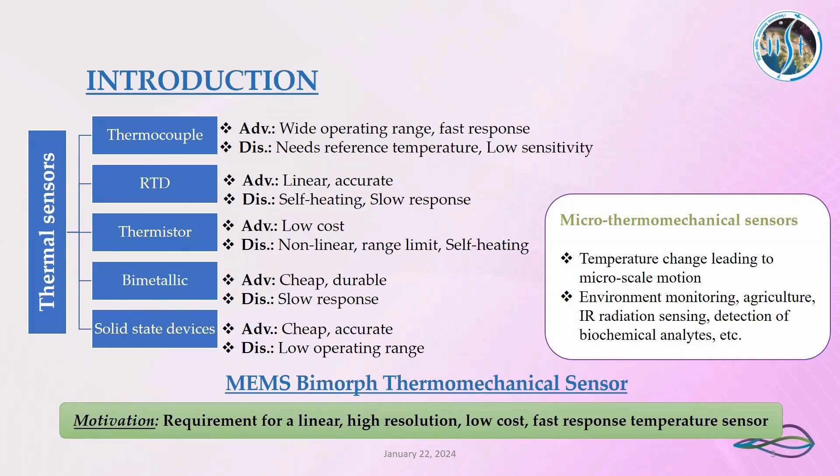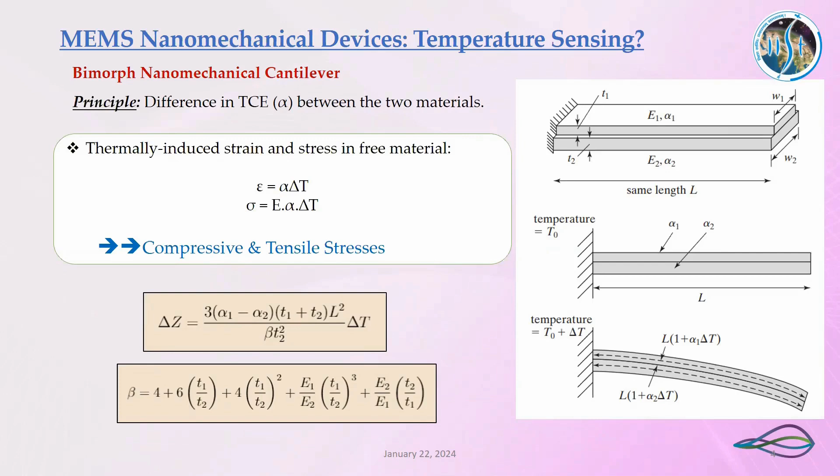So now, how can MEMS nanomechanical devices be used for temperature sensing? The answer to this is a Bimorph nanomechanical cantilever, whose principle is the difference in the thermal coefficient of expansion between the two materials. As shown here, whenever there's a difference in the thermal coefficient of expansion between the two layers, and a temperature change occurs, there will be a deflection in the tip of the beam as shown in the equation given here. So one of the layers will have a compressive stress while the other will have a tensile stress.

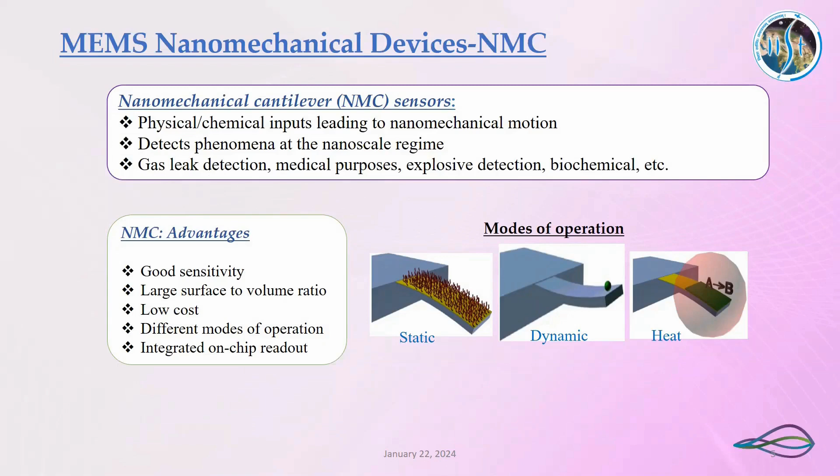A nanomechanical cantilever sensor is a device which converts any physical or chemical input into a nanomechanical motion, and these devices have several applications such as gas leak detection, medical purposes, explosive detection, etc. These cantilevers have several advantages such as good sensitivity and low cost. Nanomechanical cantilevers can be used in several modes of operation such as static mode, dynamic mode, and heat mode. In this Bimorph sensor, we have utilized the heat mode of operation for our work.

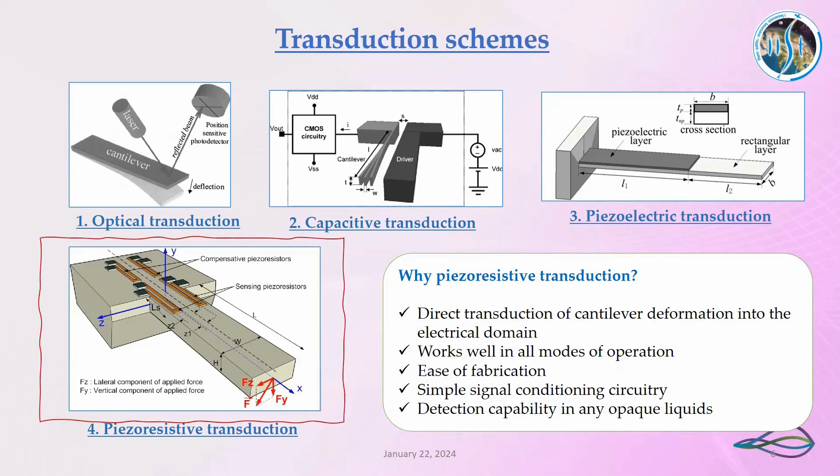There are several transduction schemes such as optical, capacitive, piezoelectric, and piezoresistive schemes. Among these, piezoresistive transduction schemes have several advantages such as direct transduction of cantilever deformation into the electrical domain and ease of fabrication. So combining the piezoresistive transduction scheme, we came up with a new architecture. For getting maximum sensitivity in piezoresistive sensing, we have to maximize the difference in the longitudinal and transverse stress, as given in the equation here.

Now consider two cases: point loading and isotropic stress loading. In the case of point load, the sensitivity is maximized since the difference between the longitudinal and transverse stress is maximum. While in the case of isotropic surface stress, the difference between the stress components is nearly zero. Hence, in order to maximize sensitivity, we have to use the case of point load. But in this Bimorph cantilever structure, it's minimized.

Hence, we have to bring up a new architecture by combining a Bimorph membrane structure with flexure. So instead of a cantilever, we use a circular Bimorph supported by flexure on four of its sides, so that the isotropic stress is converted into uniaxial stress. This new device is called the Thermo-Nanomechanical Membrane Flexure Sensor, or T-NMF.

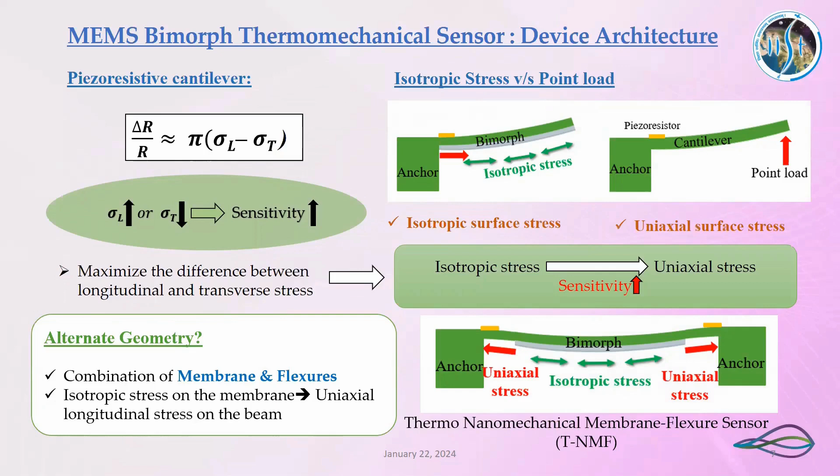Now, design and simulation. Basically, this is the structure of a T-NMF: a circular Bimorph membrane is supported by 4 beams on 4 of its sides, and on each of these beams a resistor is placed. These resistors are connected in series, forming one leg of the Wheatstone bridge. Whenever there's a temperature change, the Bimorph will bend, causing the beams to bend as well. This induces a stress in the piezoresistor, which causes a change in resistance, and this change is measured by the signal conditioning circuit.

Based on some literature review, we found that aluminum and silicon have the maximum difference in thermal coefficient of expansion between two layers, and hence we chose these two materials for the layers of the membrane. For the piezoresistive material, we needed a high gauge factor piezoresistor to maximize sensitivity, and hence we used indium tin oxide as the piezoresistive layer.

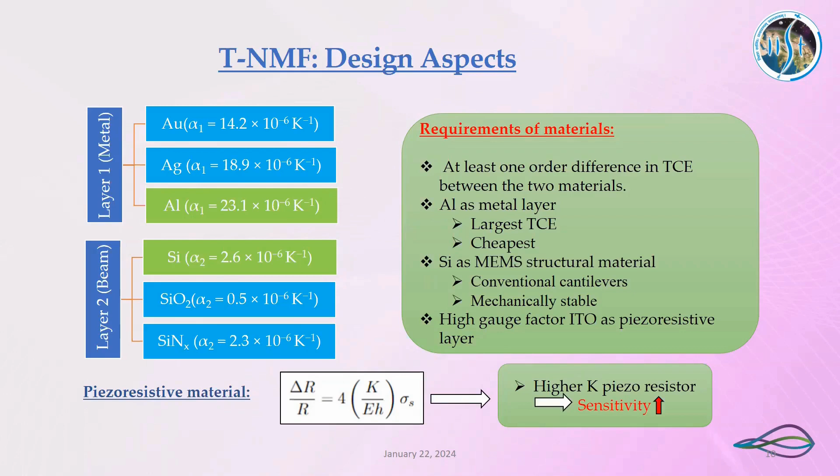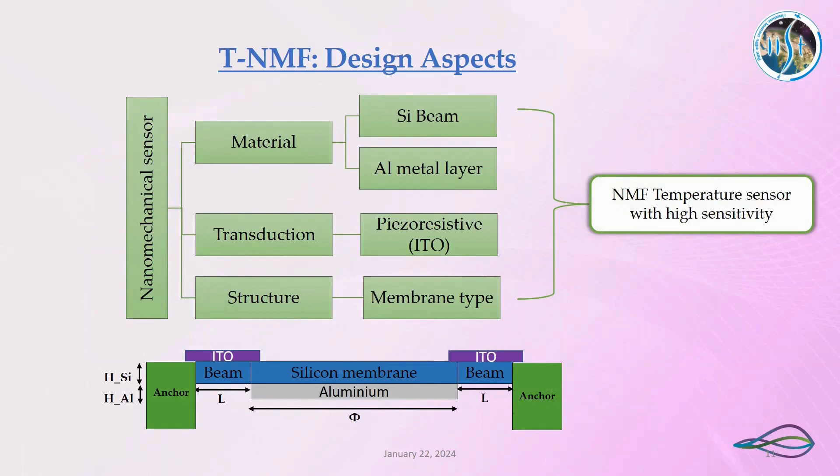This is a cross-sectional view of our device. Basically, under the silicon membrane there will be an aluminum layer, and it will be supported by beams on four of its sides.

We have identified that the structure of the beam should be an inverse trapezoidal structure for getting maximum sensitivity. This will be discussed in the coming slides.

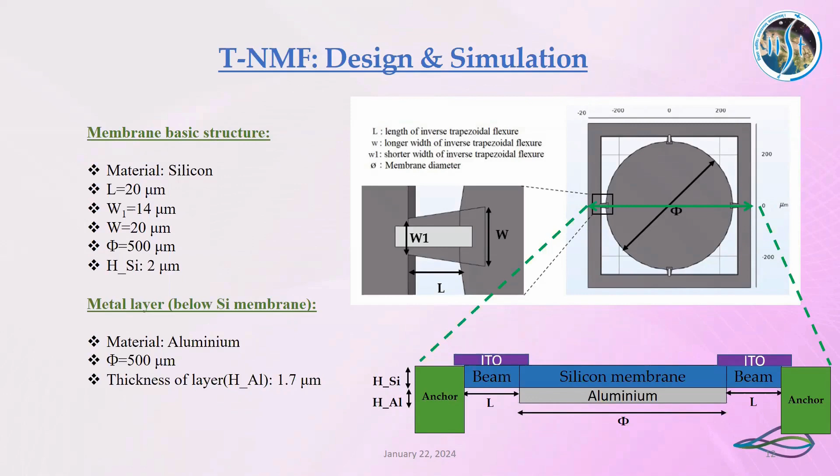As I mentioned, the aluminum layer is placed below the silicon layer, and since aluminum has a greater expansion coefficient compared to silicon, the bimorph layer will bend downwards. The displacement profile of the bimorph structure is shown on the left side.

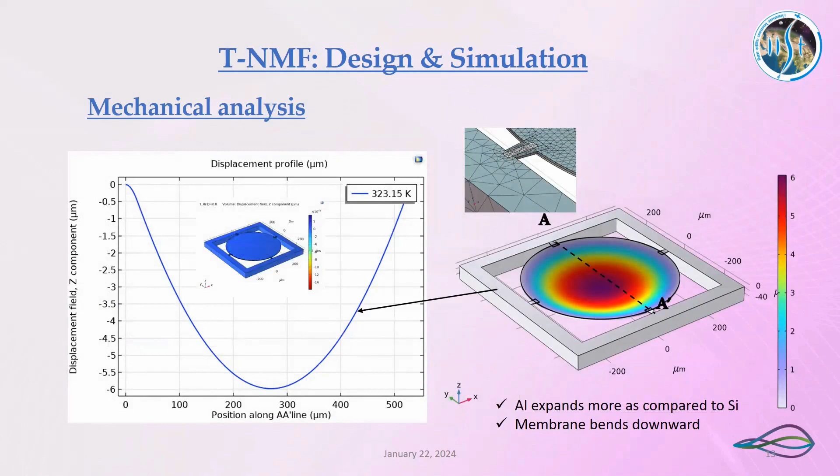This is the stress difference profile across the curvature. As can be seen, the stress in the bimorph layer is isotropic, while the stress difference along the beams is uniaxial. We can see this in the graphs shown here.

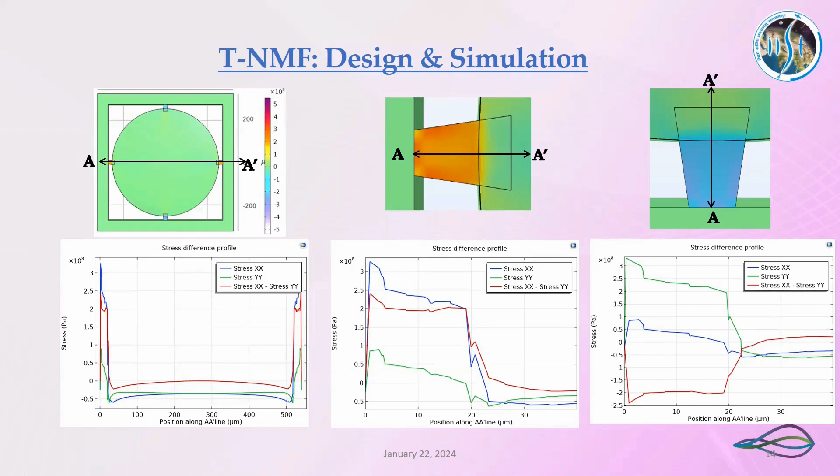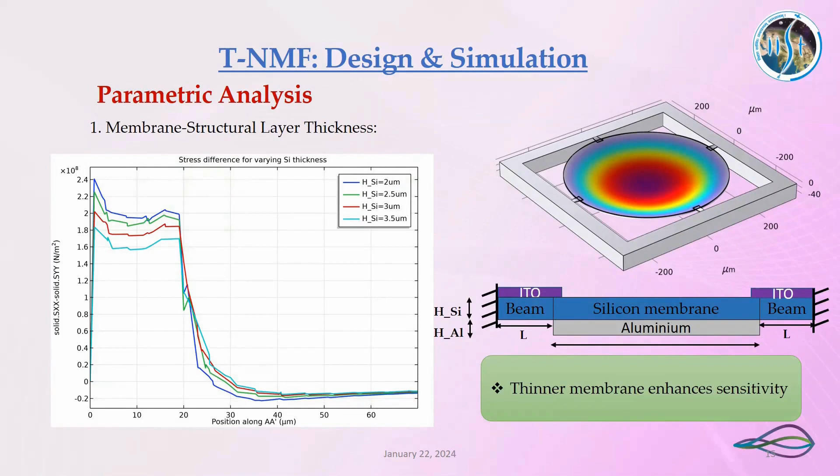We did a parametric analysis to get the best optimized structure for the T-NMF device, and we found that as the membrane thickness reduces, the sensitivity increases. Maximum deflection sensitivity was obtained at a certain thickness ratio.

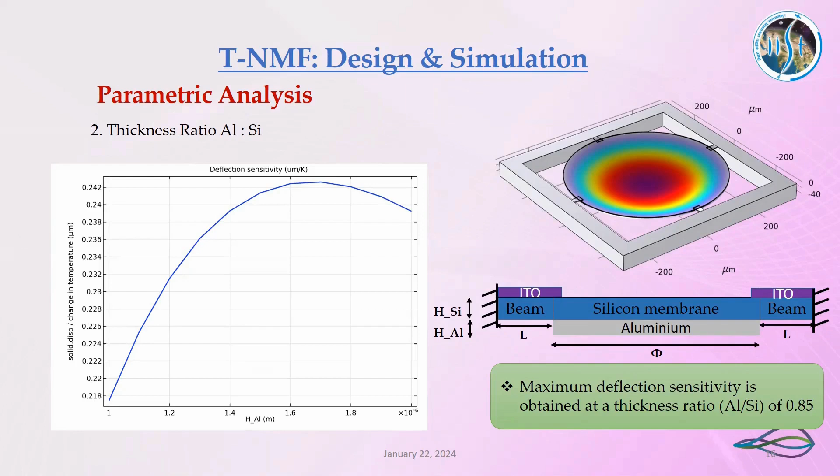We fixed the thickness of silicon at 2 micrometers, and for that thickness we had to find the thickness of aluminum to get the best sensitivity. We found that the maximum deflection sensitivity is obtained at a thickness ratio of 0.85. Hence, we fixed the thickness of aluminum as 1.7 micrometers.

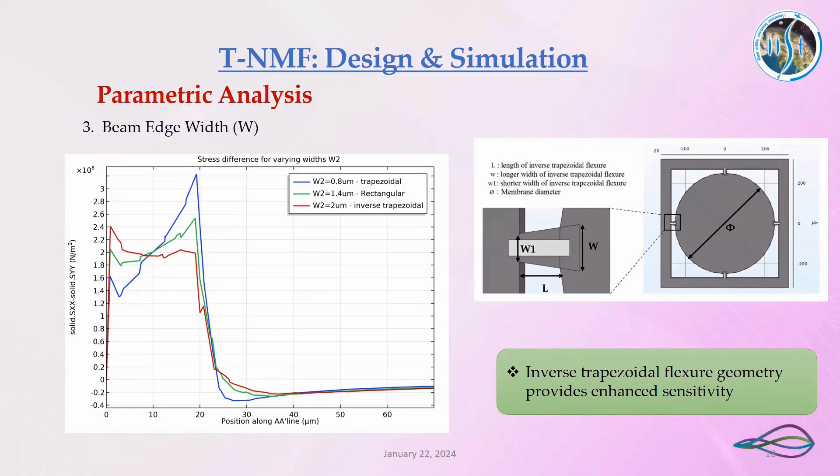We also had to fix the geometry of the beam. For that, we varied the dimension W, and found that inverse trapezoidal flexure geometry gives the best sensitivity. On varying the beam length, it was found that an increase in beam length decreases the piezoresistive sensitivity. Finalizing this, we arrived at the membrane and piezoresistor dimensions as shown.

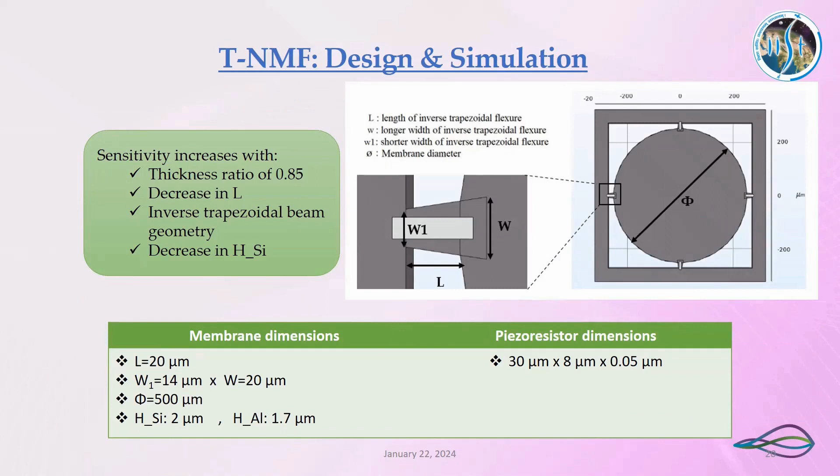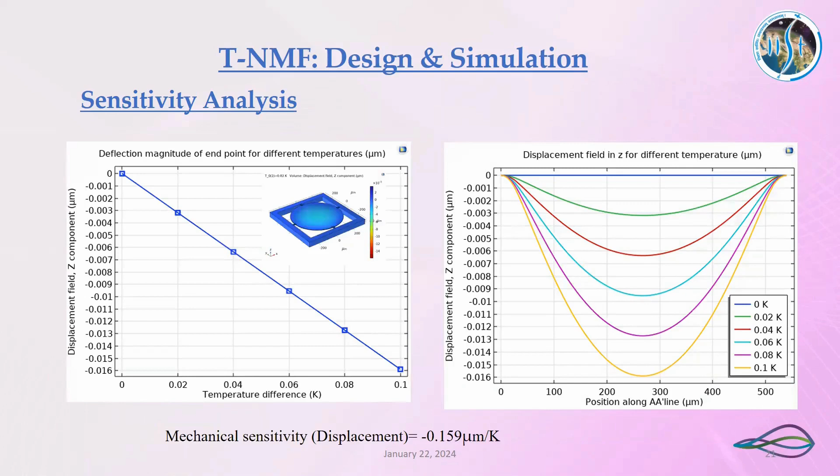On analysis of sensitivity, we found that the T-NMF structure has a mechanical sensitivity of minus 0.159 micrometer per Kelvin and a temperature sensitivity of minus 0.0107 per Kelvin, which is delta R by R per change in temperature.

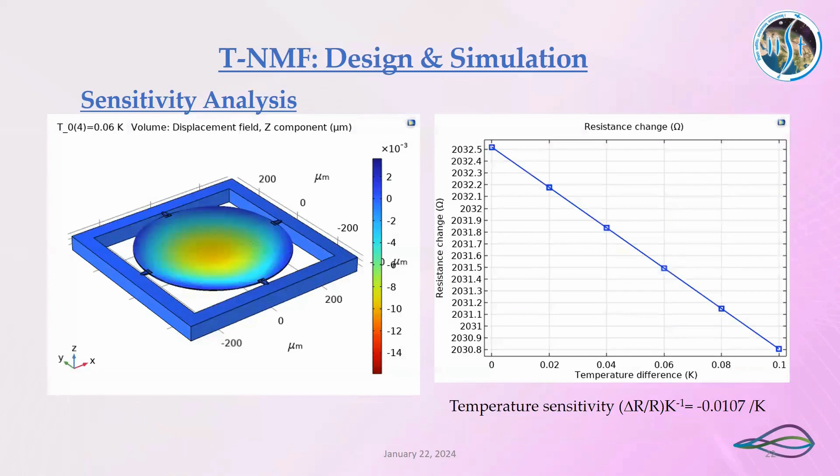We did a comparison study of this device with a conventional cantilever architecture and a thermo-nanomechanical trampoline membrane. It has been seen in literature review that this trampoline structure had been used in some studies involving resonance, so we came up with the idea of comparing the T-NMF structure with the trampoline membrane structure also.

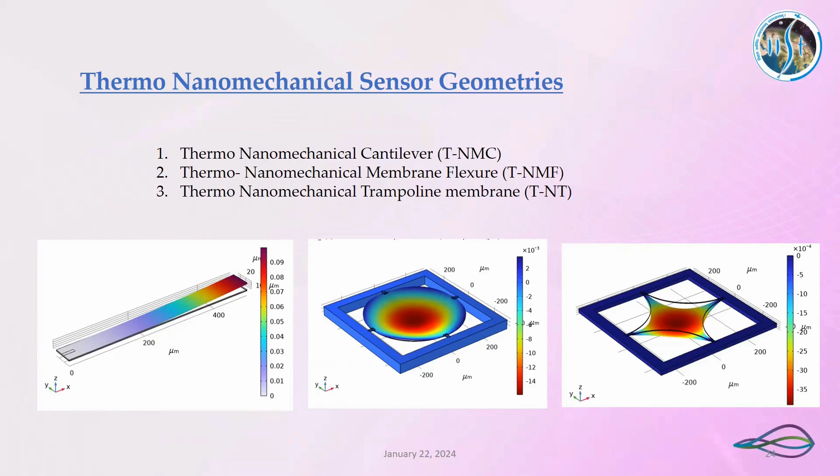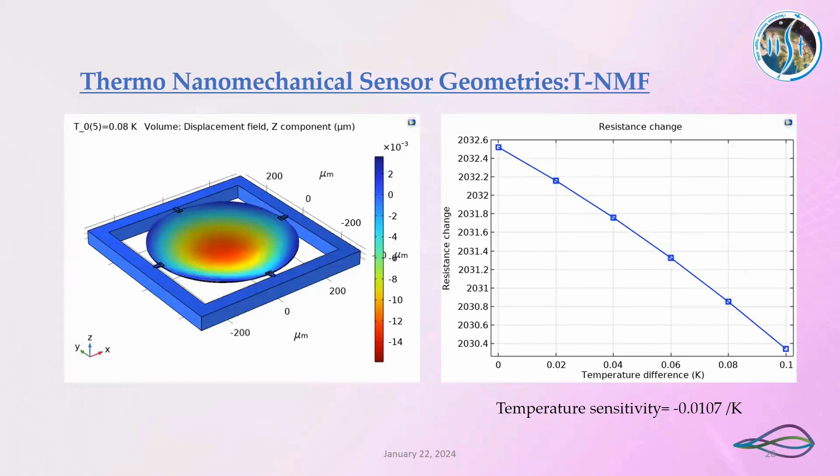The conventional cantilever sensor had a temperature sensitivity of 0.00638 per Kelvin. The T-NMF device had a temperature sensitivity of minus 0.0107 per Kelvin, and the trampoline structure had a sensitivity of minus 0.0104 per Kelvin.

The first two structures, the cantilever and the T-NMF structures, were optimized to get the best sensitivity, but the trampoline structure can still be optimized to get better sensitivity. That could be carried out as future work.

We found that the T-NMF structure has a sensitivity about 1.68 times higher than that of the cantilever temperature sensor.

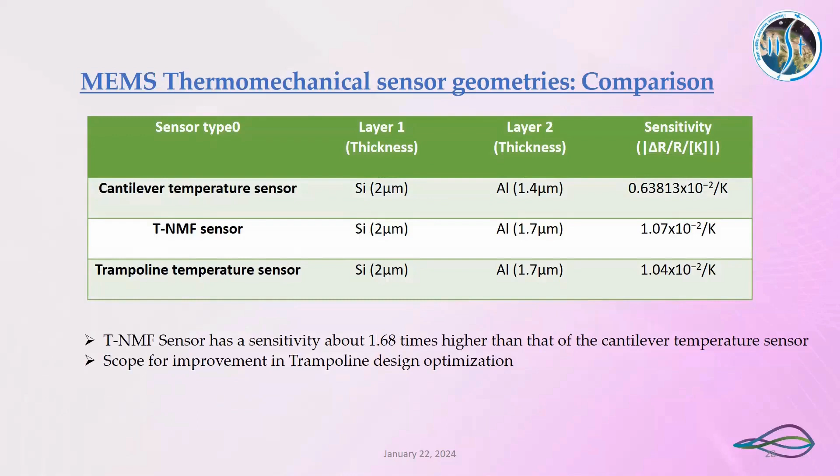We carried out some experiments as a proof of concept for studying this sensor. An NMF device had already been fabricated in a lab for carrying out another study related to hydrogen sensing.

In this device, a layer of palladium was coated below the silicon layer, but the thickness of the palladium coating was around 20 nanometers. It was really less.

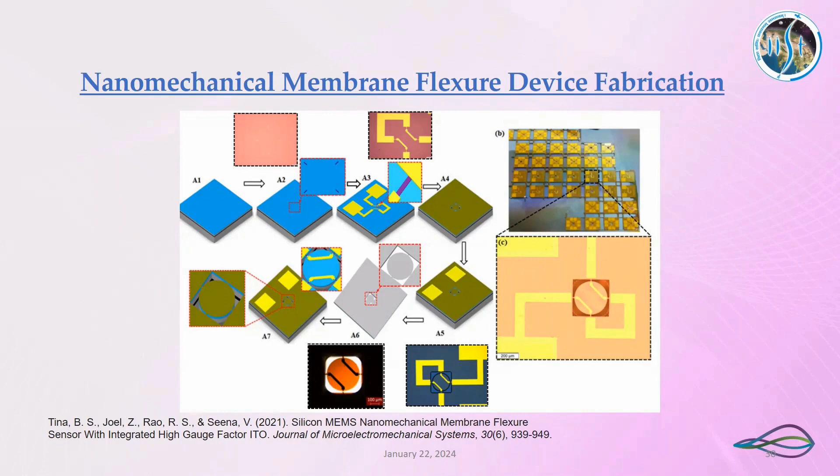So we tried to carry out the experiments with this device in order to prove the concept of bending of the bimorph structure. This was the device experiment.

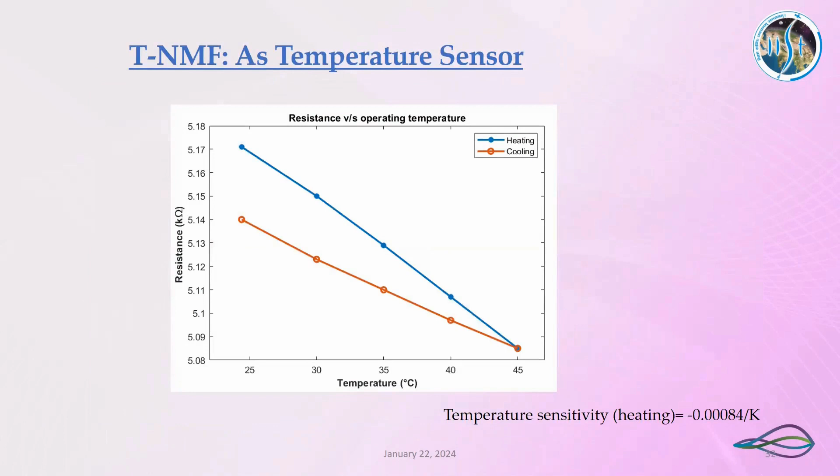We found that a temperature sensitivity of minus 0.00084 per Kelvin was obtained.

Finally, we found a proof of concept of the NMF device for temperature sensing, with a reduction in resistance with temperature. Future work of fabricating and testing the T-NMF device could be carried out, along with optimization of the trampoline sensor and application development for this device.